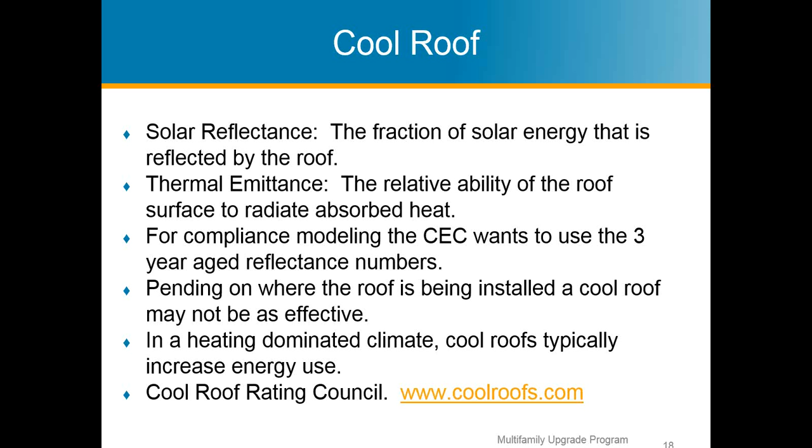So depending on where you are, again, as climate zones in California, cool roofs may not be effective. In a heating dominant climate, where it's really cold outside, a cool roof typically will increase your energy use, because you're not allowing that heat to come through when you need it. So if you're analyzing the cost benefit for a cool roof, you may see very little or no cost benefit when installing a cool roof in a heating dominant climate.

Attic radiant barriers. Similar to cool roofs, attic radiant barriers are most effective during the cooling season, so it's reducing the summer attic temperature. And for the CEC, they basically say climate zones 2, 4, and 8 through 15, if you're re-roofing or doing something with your roof, you're going to require a radiant barrier. And that's because those climate zones have a lot of cooling requirements in the summer months.

So radiant barriers come in a couple different types. Depending on the manufacturer, an attic radiant barrier could be adhered to one side of your plywood, your sheathing that's going up on your roof. So you may be able to get that continuous radiant barrier through a certain product.

Now, if you're retrofitting an attic, or the client is not going to be taking off the sheathing or doing anything to it, you can then do what's called the existing roof sheathing. So this is where it's not going to be continuous. You have your roof rafters directly on your roof sheathing, and then between those rafters is where you're going to be putting in your attic radiant barrier.

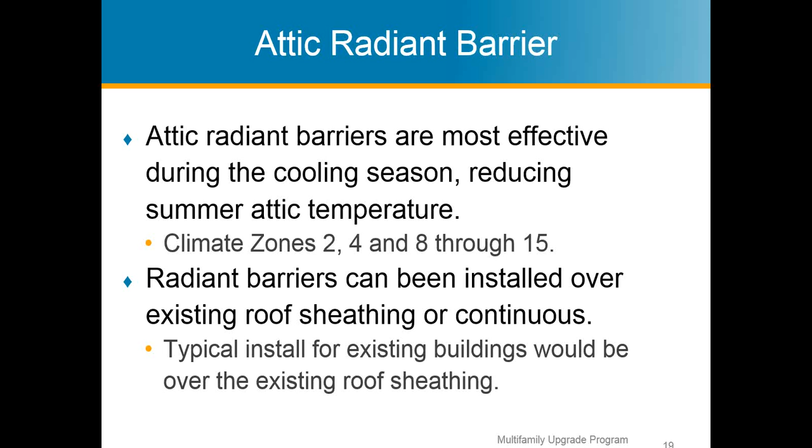So here in EnergyPro is where you would do it. You have your component description, very similar screen as you saw on the walls. If it is going to be a cool roof and it's a certified roofing product, which means you found it on the CRRC website, you select that box and you plug in those numbers that you get. If you're going to have a radiant barrier and it's an existing roof, it's going to be over the skip sheathing. The other option in this drop down will be the continuous option.

Another thing about attic radiant barriers: the manufacturers will give you some kind of attic venting requirements. They'll try to show you how this product is going to be best optimized on your building. You still need to have proper ventilation in your attic. Your attic's not going to be as comfortable to be in as the rest of your home, and if you don't have proper ventilation, it's never going to be that way. But you are going to try to reduce that attic heat.

And then, so proper attic ventilation is going to be kind of important and should be discussed with the design team when they're doing these kind of retrofits. And you can plug in that percentage of vents that are high. So they want you to have high vents and low vents, so the air moves out of there. Heat rises, right?

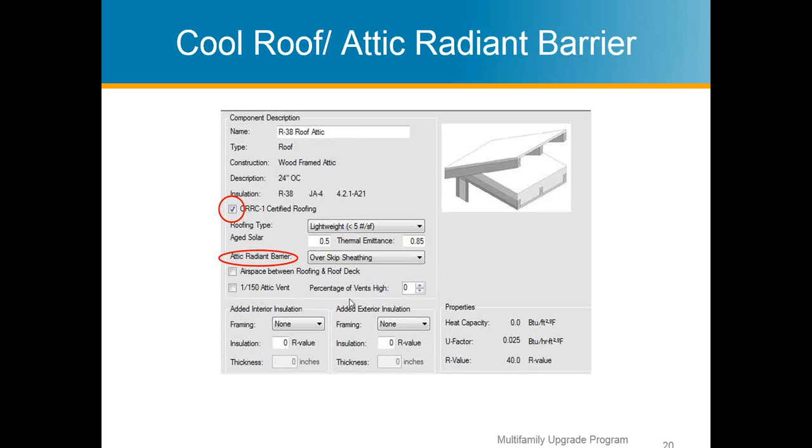The 1 per 150, that's basically saying 1 square foot of open attic vent per 150 square feet of attic area. Again, you go to the EnergyPro and click on those things and hit F1, and it'll give you a little bit more of a description. But for the most part, this information on attic venting could be found from the manufacturer, or obviously if your design team is savvy enough, they might be already all over it, and they can give you those numbers off the top of their plans.

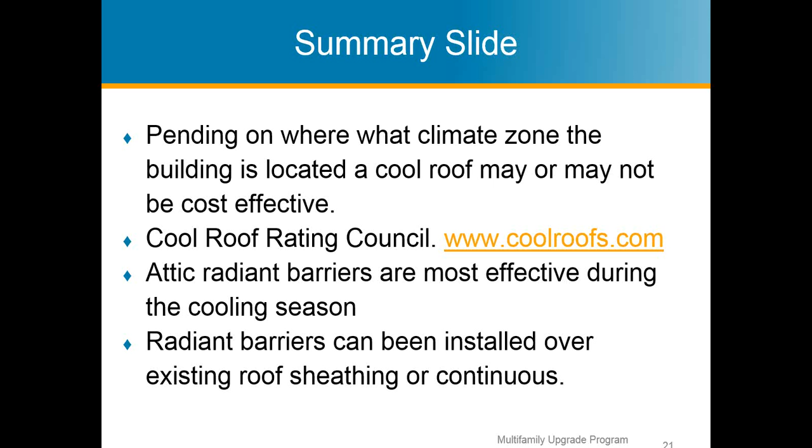So summary slide: depending on the climate zone where your building is located, cool roof may or may not be cost effective. So when you're doing that cost analysis, make sure you're looking at those things. Go to the Cool Roof Rating Council's website at www.coolroofs.com. Attic radiant barriers are most effective during the cooling season, and radiant barriers can be installed over existing roof sheathing or continuous.

So we're going to talk about added insulation. If you guys and girls have been keeping up with the building energy efficiency standards, the overall U-factors of walls have gotten pretty stringent, you could say, and that's a good thing. But to meet a lot of them, you're basically going to be required to have an exterior rigid insulation of some sort. I believe it's 0.065 for the U-factor of walls now, and so I wanted to just touch on added insulation and how to do that.

So you can add insulation to the interior or exterior, and this is going to be added insulation on top of what your 2x4, 2x6 assembly is. So you may have the need to use furring strips. Where it says framing here, that's called the framing type, and it could be wood or metal. You may see this if you do any properties that have basements that are habitable spaces with CMU blocks. They may want to put added insulation on the CMU blocks, and the way to get that insulation in there would be to put up 2x4s, and that would technically be your furring, and then you would put your insulation in between there, put your drywall on, and so on. You can basically close up the wall that way.

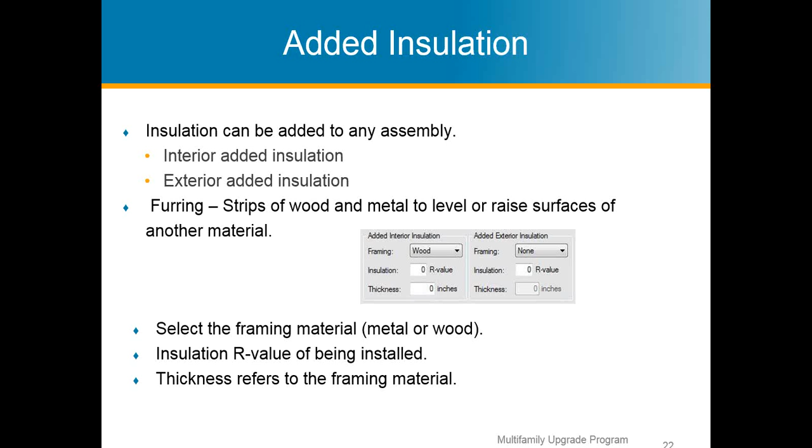So you could select wood or metal, as I said, and where it says insulation, that's the R-value of insulation that you're going to be putting into the wall. And the thickness refers to the framing member, not the thickness of the insulation, but the framing member that you're adding as your furring. I'll show you some examples here. So I've taken an R13 wall, and there's no added insulation. So 0.102 is your overall U-factor.

Overall R value is 9.8. So that's basically being derated because of the thermal conductivity between the studs, right? Now, over here on the right, you have the same R13 wall, and you're adding insulation of an R5 value, and I'm saying it's a 2x4 framing member, so 3.5 inches technically, furring added, and so you're reducing your U factor, so lower is better, right?

So 0.102 goes down to 0.067, and then even down here, I'm showing without the wood framing, so I have no furring going on here. Same insulation value, and as you can see, when it went to none, the thickness grays out. You're at 0.068.

So yeah, you're getting a little bit of a difference when you don't have the framing member. It's not much, but depending on how big your wall is, it might make a big effect on it. So that's where you would do your added insulation. Looking at your plans, or looking at the scope of work, you might see that they're going to do rigid or something like that, and you're going to have to ask these questions, like how are you going to construct it, show me the details on how it's getting built, so you can model it with accuracy.

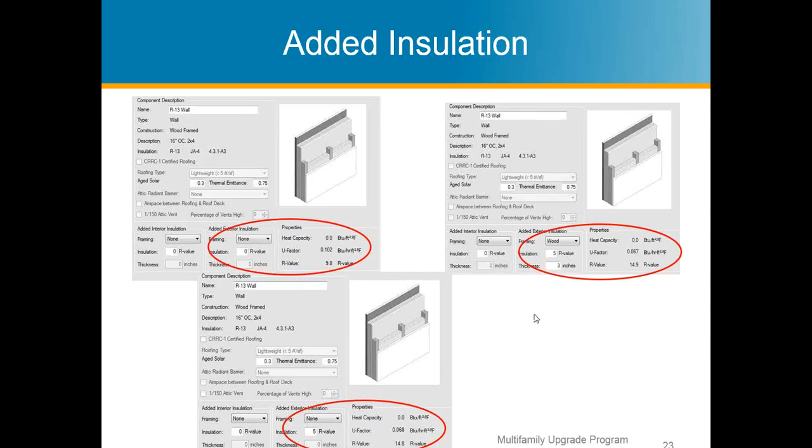And I guess we'll move on, last but not least, to my thermal mass discussion. So thermal mass basically is the ability of a material to absorb and store heat energy. And thermal mass is most useful in locations with large swings of temperature from day and night. So, deserts, or any place that has a large swing of temperature.

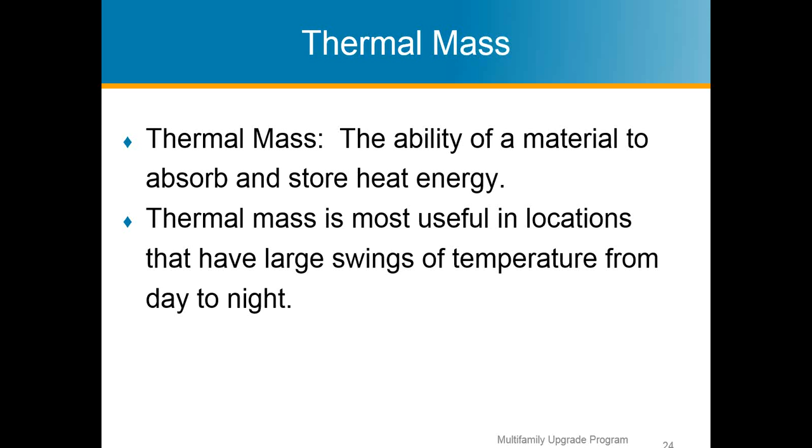Between the day and night, you want to store that heat that thermal mass is going to absorb during the daytime, and then at night, as the building cools down, the heat will radiate out of that material. Depending on the type of material, it's going to radiate that heat quicker or slower. Concrete holds that heat in for longer than, say, wood. So you can check that kind of stuff out. The residential joint appendices give you a good explanation of materials and properties and things of that nature.

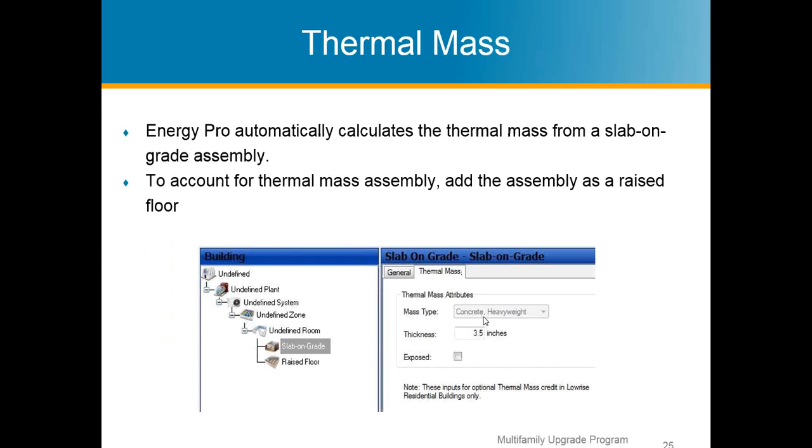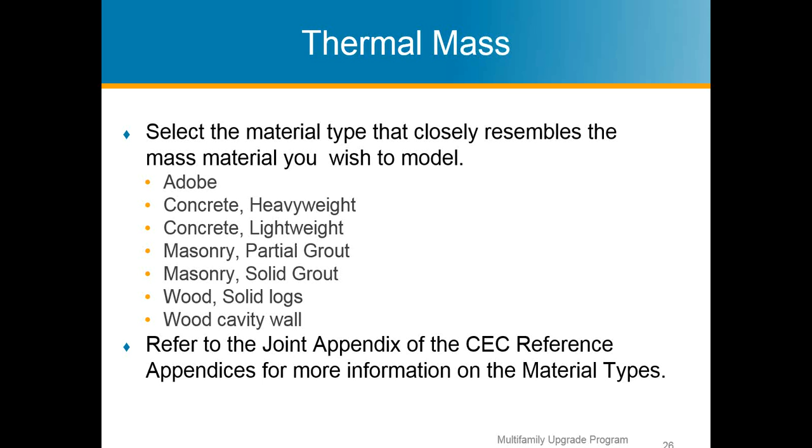So to account for thermal mass, you need to actually put it in as a raised floor. So there's potentially, well, I'll get into that in a second. So you add in a raised floor, and you get these selections of the material that floor is from the drop down. This drop down will not be gray anymore, and you can now select from these types of materials. And as I said before, the CEC reference joint appendices have more information on those material types.

So here we've entered it as concrete heavyweight, and we're saying it's 4 inches thick, and it's an exposed material, meaning it's exposed to the sun. Or if the mass is covered by carpet, cabinets, anything fixed to the room, then you're going to have to model that area separately. You should only be modeling the area that is exposed for thermal mass. So potentially, you're going to have multiple floor types when you're trying to accurately model thermal mass.

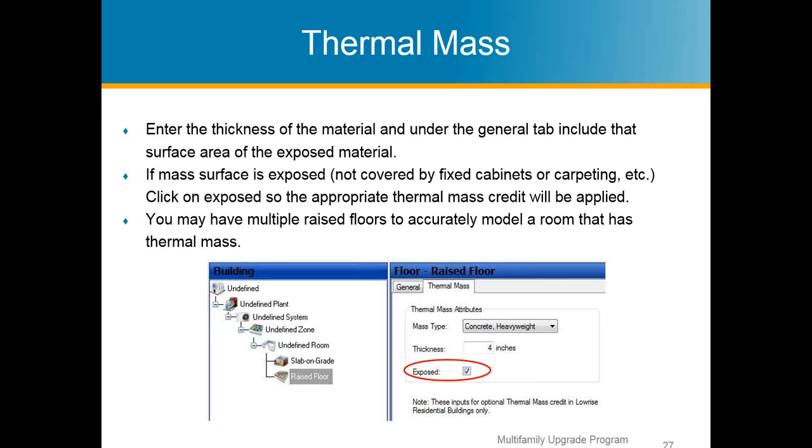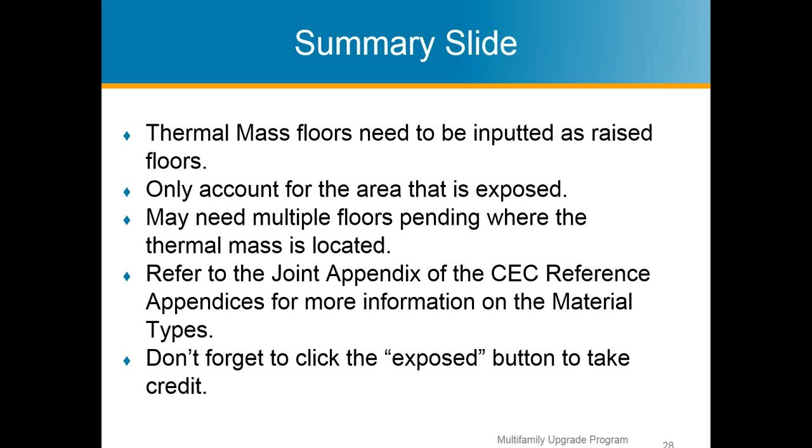So basically, we're at the end of the slides. These are a few architectural building features that I see out there that are becoming more prevalent in the built world, the built environment. And as we try to lower our energy consumption and energy use, we really need to start taking into consideration these architectural building features to right-size equipment. And if you ever deal with passive solar or passive house, these things are going to be all over the place for that.

And you're going to want to really hone in on them because the value that you're going to have for your client is going to be way better than if they, no disrespect to any mechanical engineers out there, just grab the mechanical engineer and say, can you do a Title 24 for me? They give them a Title 24 and they say their load requires a 4-ton HVAC system, and they go back and say, well, this is supposed to be a sustainable passive house, no HVAC.

So as energy consultants, we want to do the right thing and model these things with accuracy as much as we can. It may take a little bit more time, but the end outcome is good for you, your client, and the built environment we live in. So with that, are there any questions, Mike?